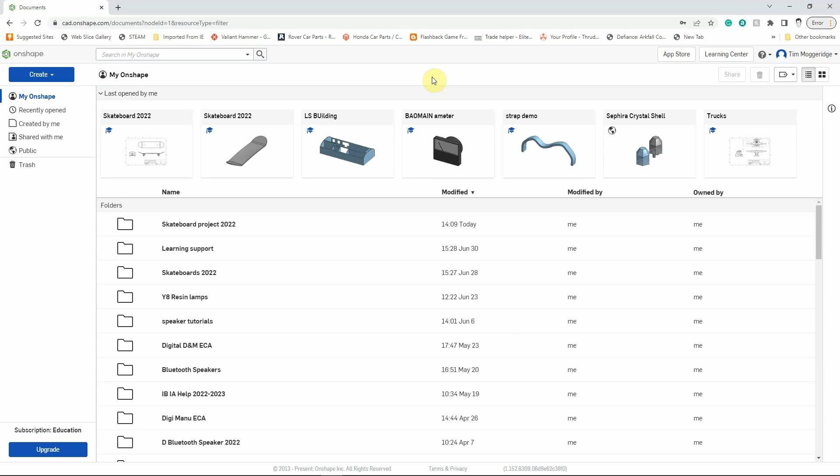So let's get our file open up so that we can work on it. We're going to go to our skateboard project and open up our file by double clicking on it, and that will load into the modeling area. Here's the deck that we created in the last video tutorial.

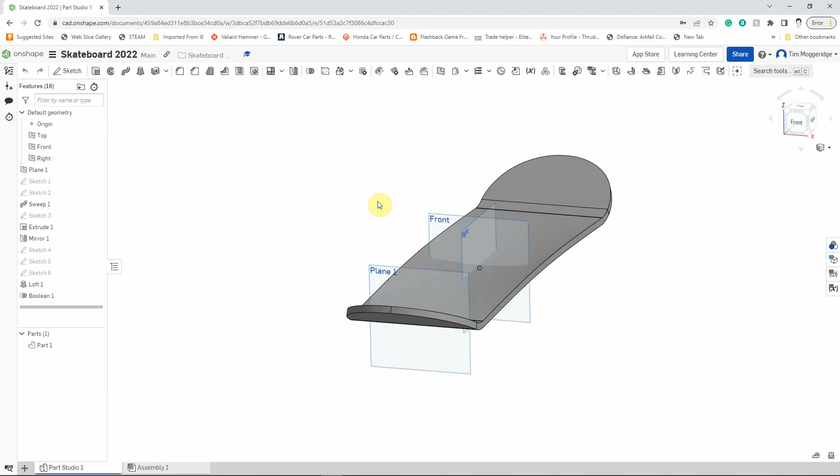We're going to want to put in holes for assembling the deck to this, and we're going to do that on the top work plane. Now our top work plane is actually buried within the model, but we can still right click on the top work plane over on the list on the left hand side to create a new sketch. So left click, new sketch.

And then we're going to press N to view onto that work plane, so nice and flat, easier to draw. Now it doesn't matter if it orientates around the other way, if it's horizontal or vertical, just change the way in which you draw this.

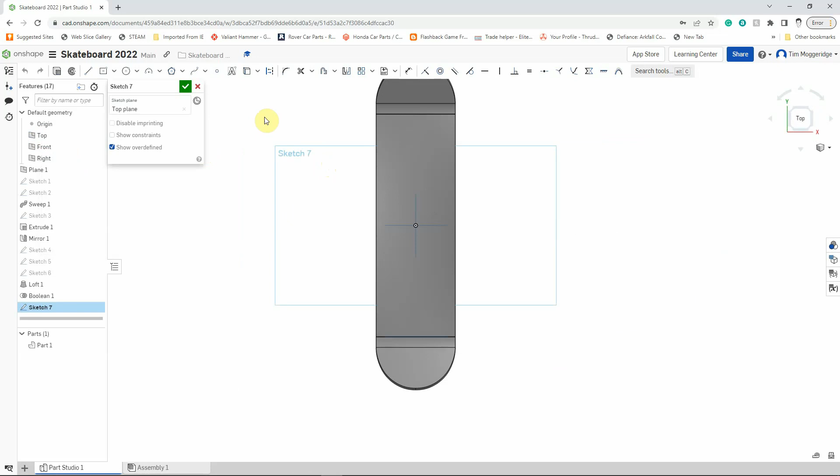So we're going to create a series of holes that we're going to cut through the deck. Let's do that. I'm going to start off with a center point circle, and I'm just going to draw that down the bottom left hand corner as I'm looking at it, and I'm just going to drag it out, and it's going to be too big and in the wrong place, but that doesn't matter because we're going to use the dimension tool. I'll leave it big to start with.

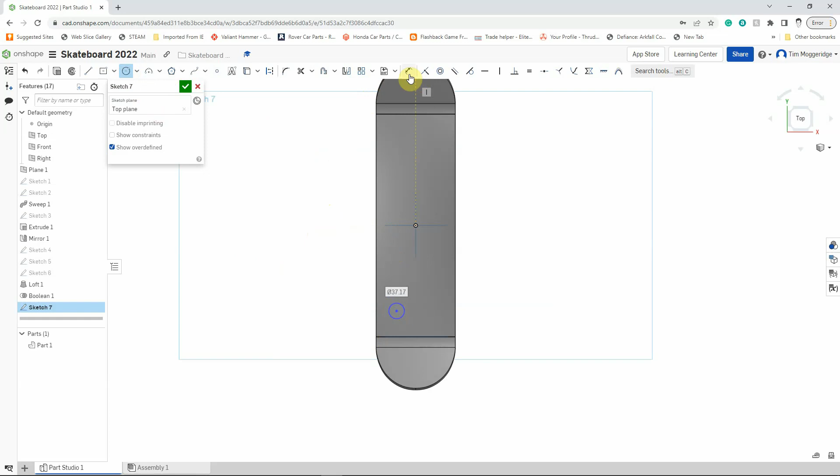So I'm going to use the dimension tool. I'm going to come from the origin, or I could also come from the edge of the front work plane, and I'm going to go to the center of the circle, and that distance wants to be 250 millimeters. I now want to come from the origin or the right work plane again to the center of the circle, and that distance wants to be 21 millimeters. So this is our first hole.

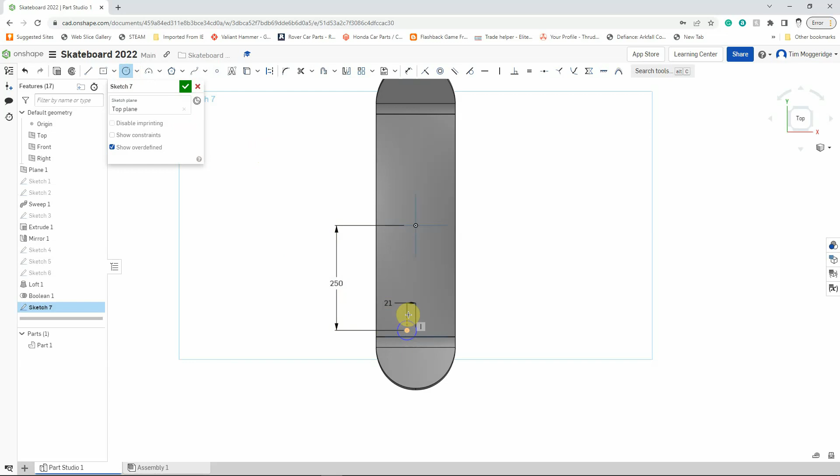I'm now going to draw a second circle, but I want to make sure that I align it with the center of this circle. So I'm going to go to the circle tool, hover over the center of the circle that we've already got, and then go up - hopefully you can see a dotted orange line to show that the center of this one's going to be lined with it. Left click to place the center, move out, left click again, and I've got that circle drawn. So let's add some dimensions in now.

So I'm going to dimension the distance between those two circles, from the center of this one to the center of that one, and I want that to be 63 millimeters. So type in 63 on the keyboard, hit enter, and you can see they're quite close.

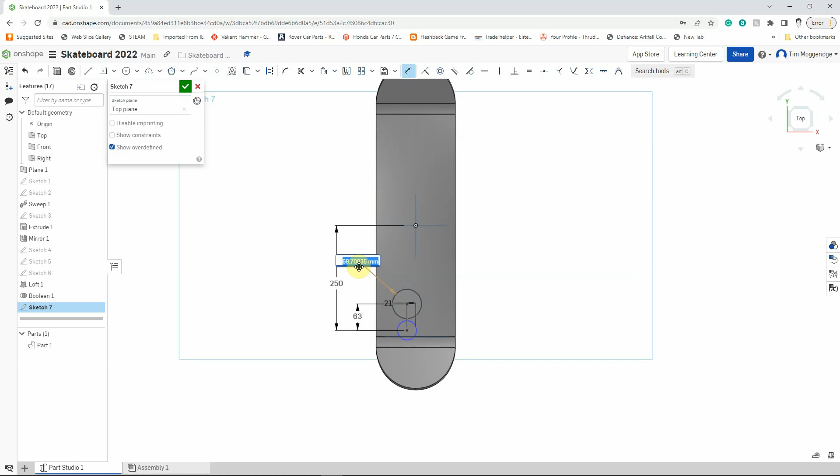Whilst I've got the dimension tool, I'll dimension this circle as well. So I'm going to left click on the edge of the circle, and I'm going to change the diameter to 5 millimeters. Now I could also, just zooming in with the scroll wheel now, I could also dimension this one.

But if we wanted to change the sizes at a later date, why change two dimensions when we can change one? So I'm going to use the equal constraint to make both of them the same. I'm going to use the equal tool, left click on this circle, left click on that one, and this one changes to the same size.

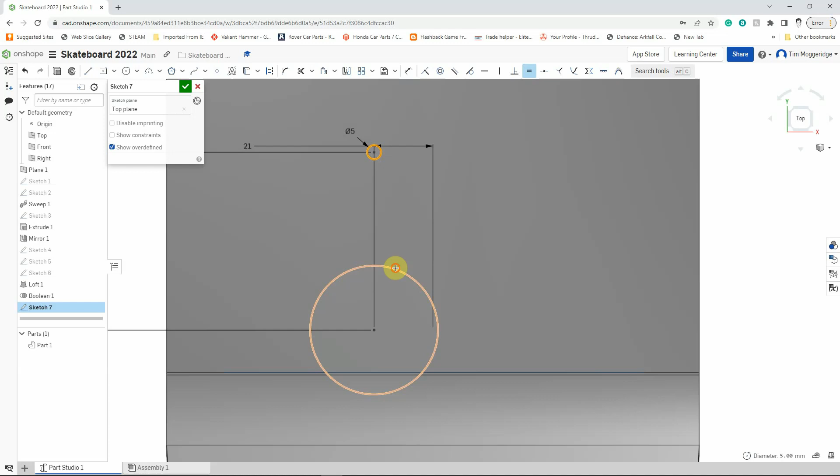Now again, as I said in the last video, if you can't see all of the constraints, sometimes they're hidden under a menu from the arrow, so just click on the arrow and that should give you all of the options.

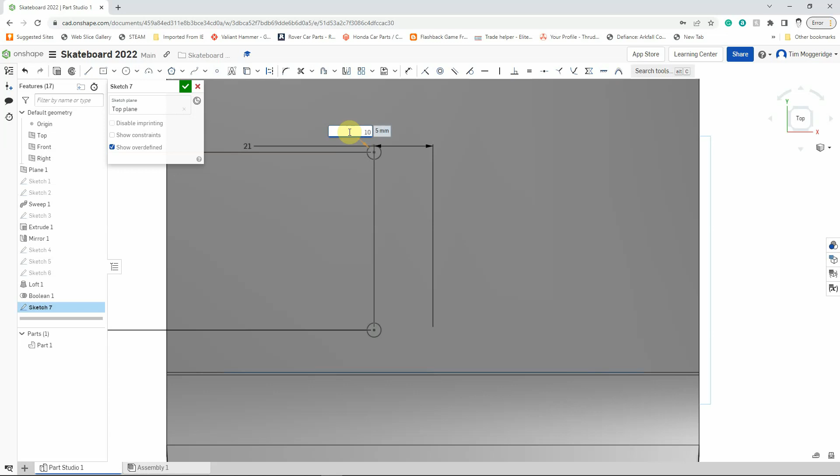Why is that useful? Because say we wanted to change our mounting holes, we were using different size bolts, we could just go in and change the dimension of one of them. So say it needed to be 10 millimeters, we can change that, and it changes the other one as well. Let's double click, select it, change it back to 5.

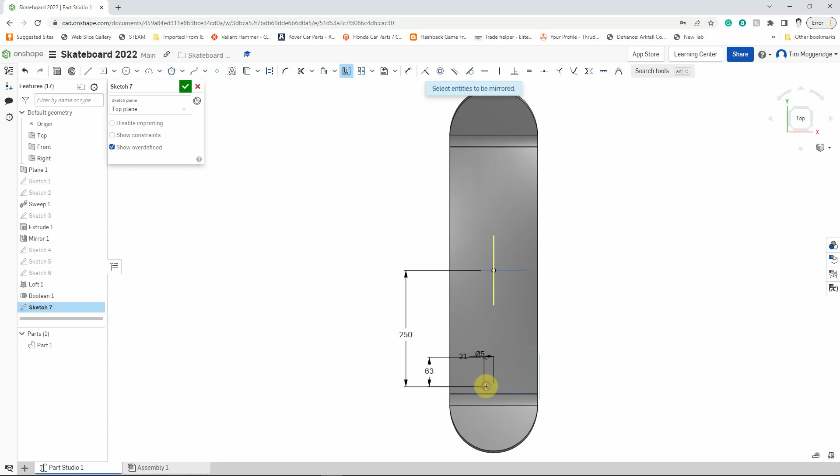So we've got two mounting holes, but we need a couple more. I'm going to right click, zoom to fit, just so we can see the edge of this plane. Now I'm going to use the mirror tool. Select a mirror line, it's going to be the edge of the right work plane. Select what we want to mirror, that circle and that circle. Make sure we get the edges and not the points, that's what the error message was. There we go, we've got that mirrored.

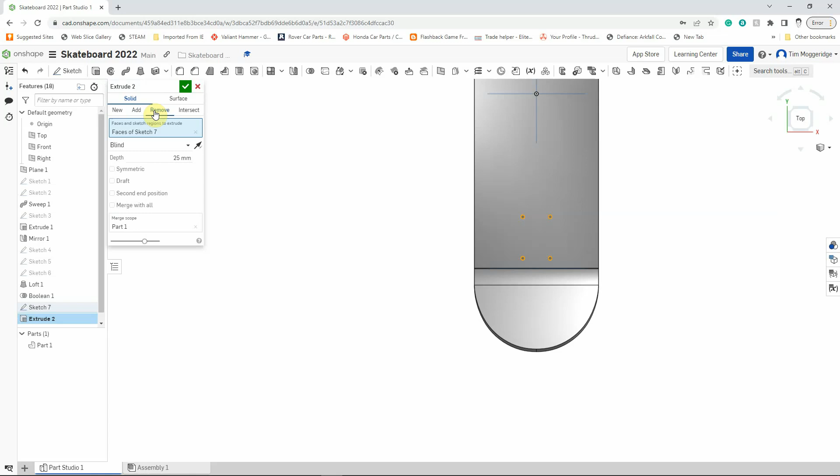So what we now want to do is just remove material to create those mounting holes. Let's use the extrude feature, and we're going to remove, and because the plane we've drawn it on is in the middle, we actually want to go both sides of that. The deck is 10 millimeters thick, so we can leave the default of 25, and click on symmetric, which means it goes in both directions. If I click the tick you can see we've got holes going through there.

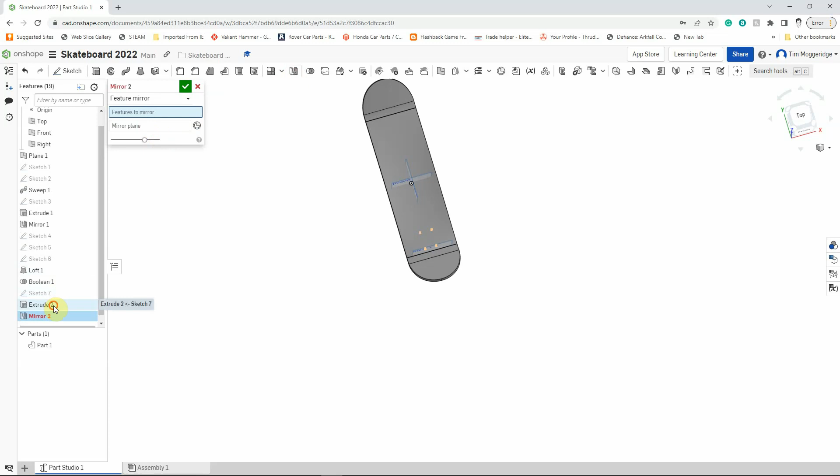And we want some holes in the same position on the other side, so this time let's mirror the feature. We use the mirror tool, change it from part mirror to feature mirror. The feature to mirror is going to be extrude 2, and the mirror plane is going to be the front plane. Click the tick to say we're happy, and we've got both sets of holes.

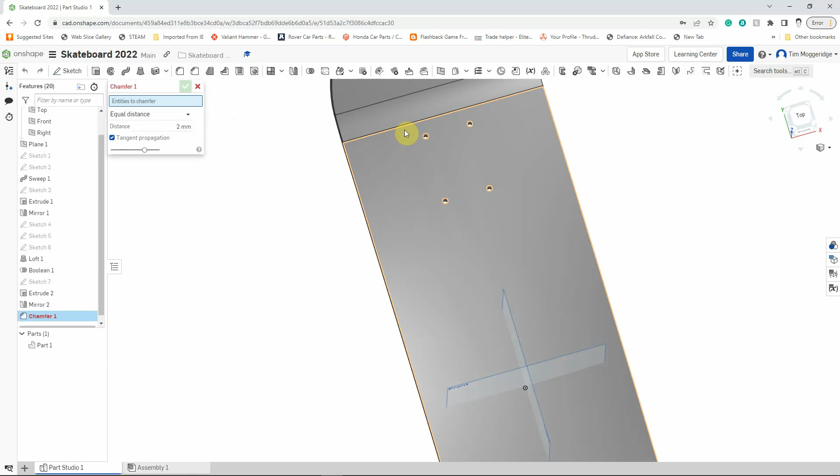Now just the last thing to do on these holes, because the screws we were using to make our skateboards are countersunk, we ought to make these countersunk holes as well. So we're going to use the chamfer tool. We want a distance of 2mm, so change that to 2mm if it isn't already. And just the top edge of each of those holes, zoom in if it makes it easier with the scroll wheel on the mouse. Zoom out, zoom in again to do these. And they're all done, so click the tick to say we're happy.

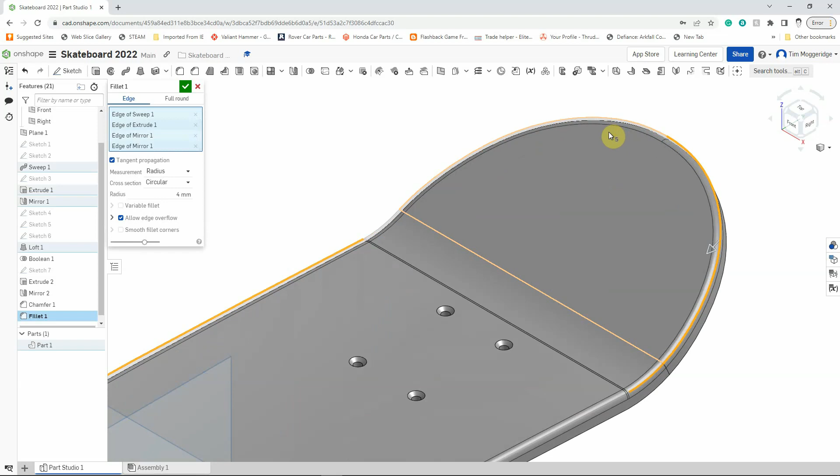Right click, isometric, so there's our skateboard so far. The last thing to do is put a little radius or fillet onto the edges of the skateboard, so we'll do that with the fillet tool. We want that to be 4mm, so change that if it's not already done. Then just click on all of the edges around the skateboard, on both the top surface and the bottom surface. Just zoom in and out to make sure you're selecting all of those.

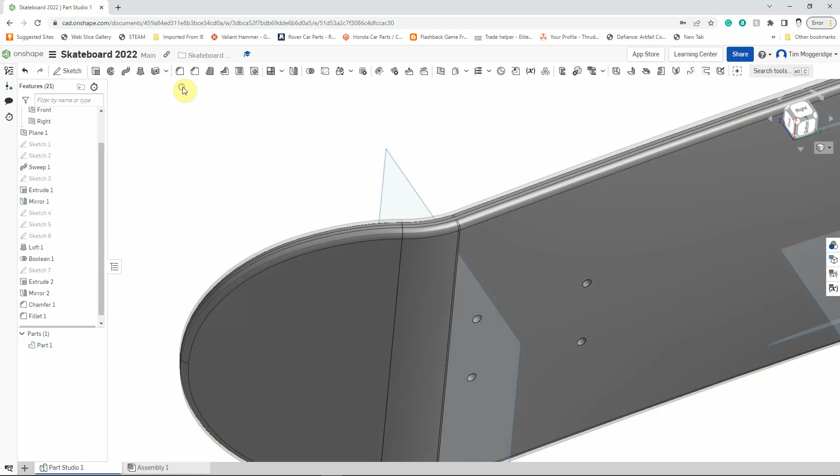And there we go, that's all done. That is our skateboard deck finished. Right click, left click on isometric, we can view it in its glory. And if you wanted to do a screenshot and didn't want the work planes visible, go to the menu on the left and click on the little eye, which will turn off the work planes. Likewise, you can do the same with the origin if you don't want that there, for a nice clean model if you were going to put it in a portfolio.

That's the end of the second tutorial, the deck completed. In the third tutorial, we'll model the gasket that fits between the skateboard deck and the trucks. Thanks for watching.